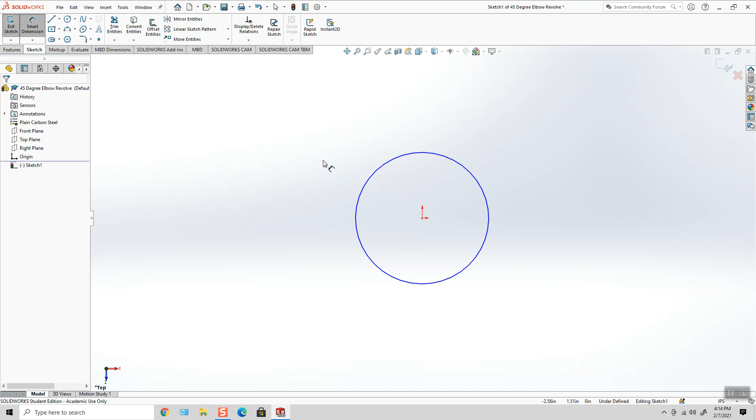This circle represents the outside diameter of the elbow, the main midsection of this part. So to get that, it's going to be the through hole, which is 1.62, plus 0.375, plus 0.375, 3/8 per wall of this circular tube. When you add all that up, it comes out to 2.37, but these numbers are all fractional, so it's safe to assume that the outside diameter would be 2 3/8.

And I can round that up to 2.375, and then SolidWorks will round down for me. So it's very minor. If there's a fraction on a blueprint, this is my approach.

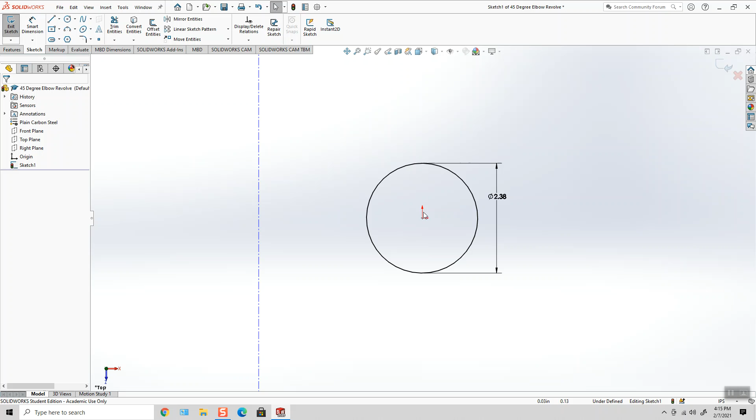Now, because I'm using the Revolve command, I need to sketch a center line which represents my axis of revolution. I have an infinite length center line at some distance to the left of my origin, but if I think of this as my center line, it's also going to be the radius that you see on the blueprint in the front view. So the 4.88 radius

is the key. So now if I put my isometric view on, all I have is a circle that's attached to my origin and a center line, an infinite length center line that's 4.88 inches away.

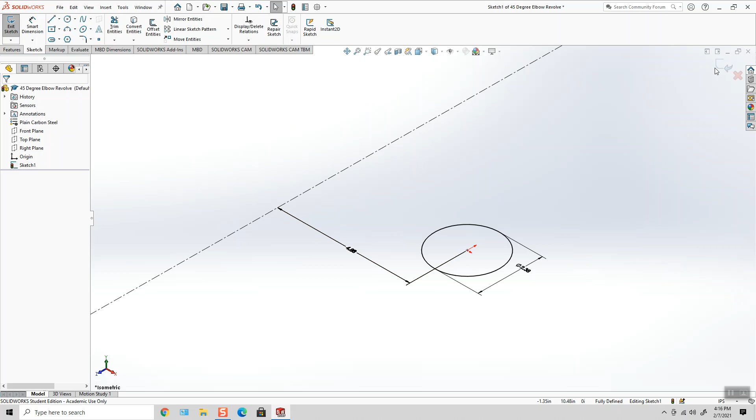Now if I select Revolve, SolidWorks wants to take this circle and revolve it 360 degrees around the axis of revolution, but that's not what we want. So we don't want 360, I'll switch that to 45.

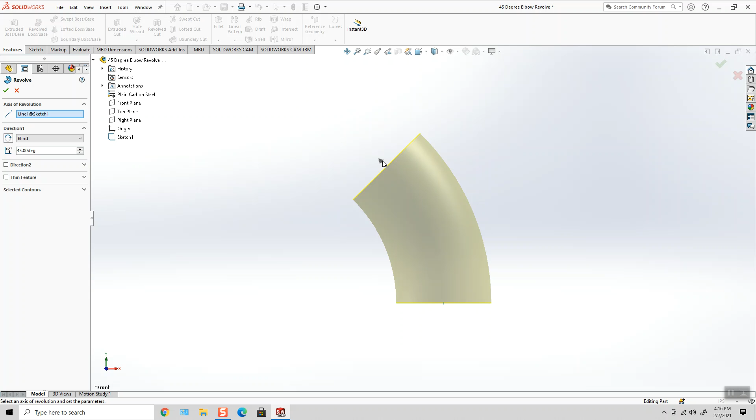So now looking at it from the front view, we have drawn that circle on the top plane, and now that circle travels up here to 45 degrees. We know our center axis is correct because it's part of our sketch, so that in fact is our radius.

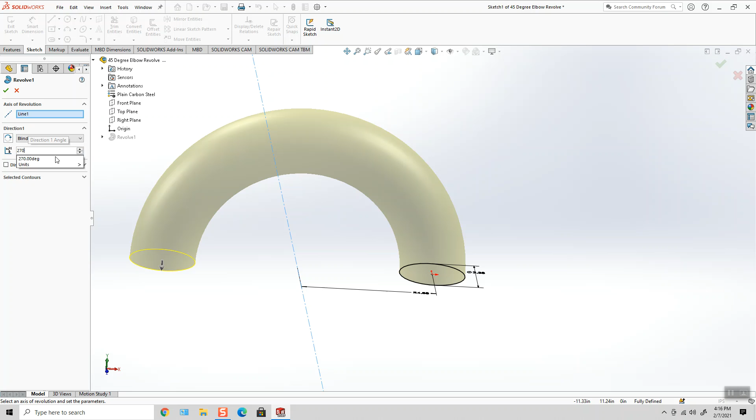The nice thing about this is now I can edit this feature, change it to 90 degrees, change it to 180, 270. I don't think it would go to 360, but you can see we have a lot of functionality where if I had a flange here, this would be my driving feature and would move that flange to those locations.

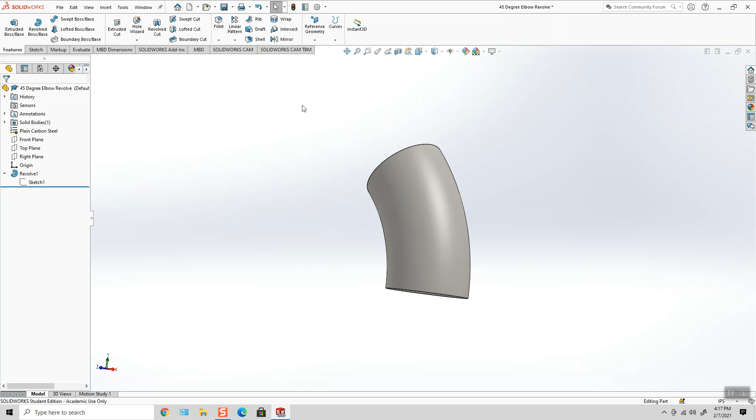So I'm going to set this back to 45. Put my isometric view on because I know it works. I know it doesn't fail. I can manipulate it, so that's good. My sketch is pretty concrete because all it contains is a circle and a line, a center line, so it's pretty simple. And we've got a ton of functionality with this feature now.

So perfect time to click File, Save, because I don't want to have to do any of that again.

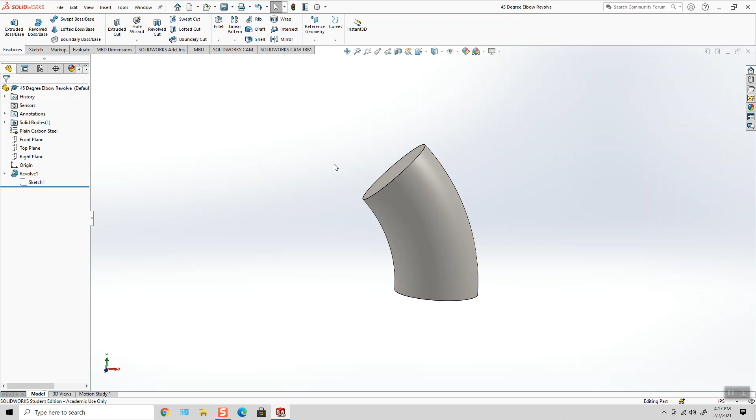Now I can choose to model the base or the top flange. So I'm going to start with the base. I'm going to sketch on the bottom surface of the part. Or I could sketch on the top plane, either or. And I guess I'm going to sketch on the top plane.

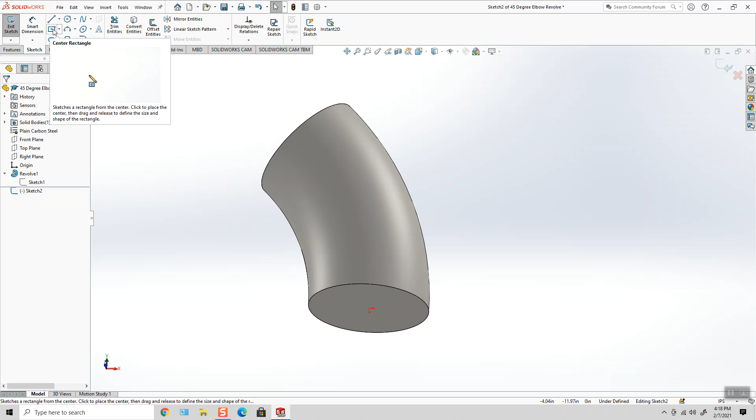It's a little bit more robust. So sketching on the top plane, which is also on the bottom of the part, I'm going to create a center point rectangle. I'm going to set the left or the right and top as equal because I want a 3.75 square. So from here to here is 3.75. And if you want to be fancy, before you exit the sketch, on the left-hand side, you can just hit this little square symbol, and now it tells the machinist that this is a 3.75 square.

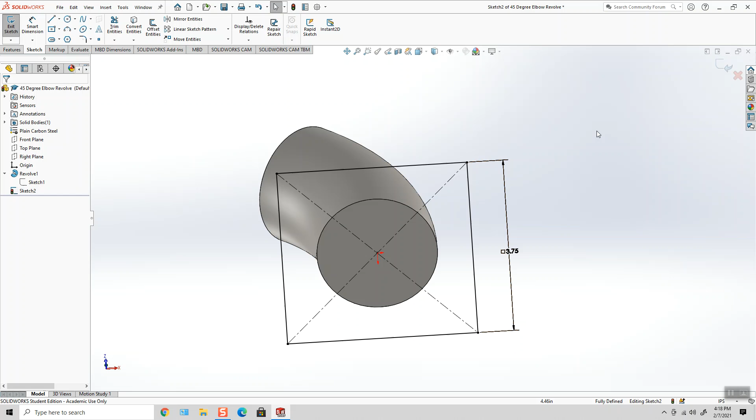I'm not going to add the fillets or the drilled holes at this time because I just prefer to make them as features. So now it's extruded, and I'm going to move on to the top flange next.

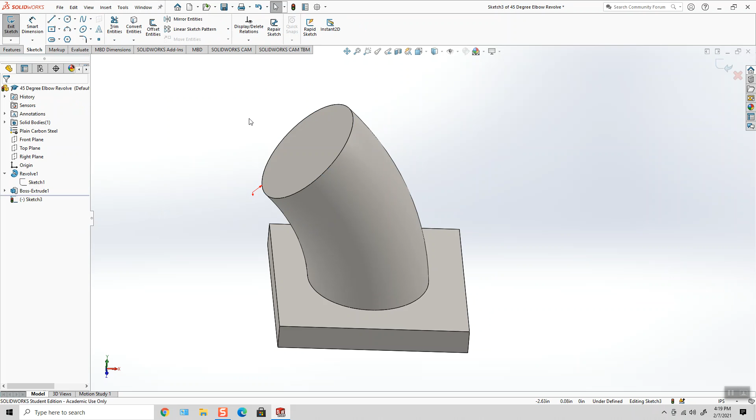Actually, I'll do a quick file save. And now I'll sketch on the top surface. I'm going to draw a circle off to the side and dimension it to 3.88 per the blueprint.

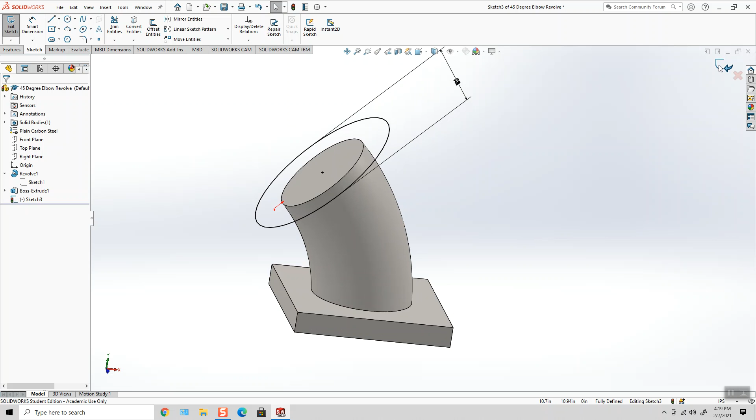And now I'm going to manually add a relation between this circle and this circle, forcing them to be concentric. I like to draw the circle off to the side and manually add the relation. I just think you get it right 100% of the time if you do it that way versus letting SolidWorks assume or guess.

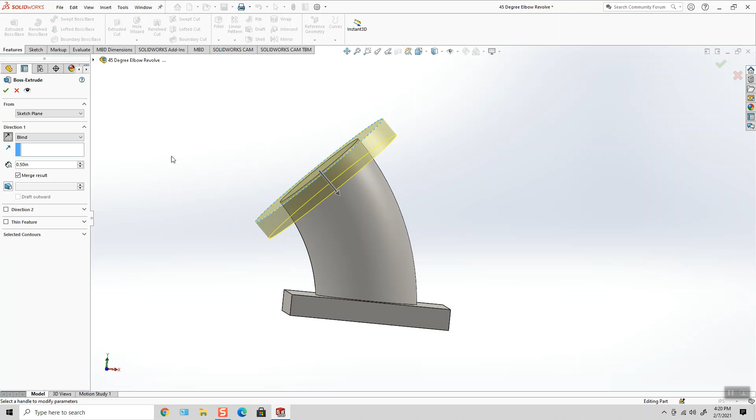So now I'm going to add an extrude in this direction, not that direction, because that would make the part too long. I think the angle would change. We want it here. The end of our angle stops at the end of this elbow, so I don't want anything going past that. So you'd have to hit the reverse direction button in order for that to work.

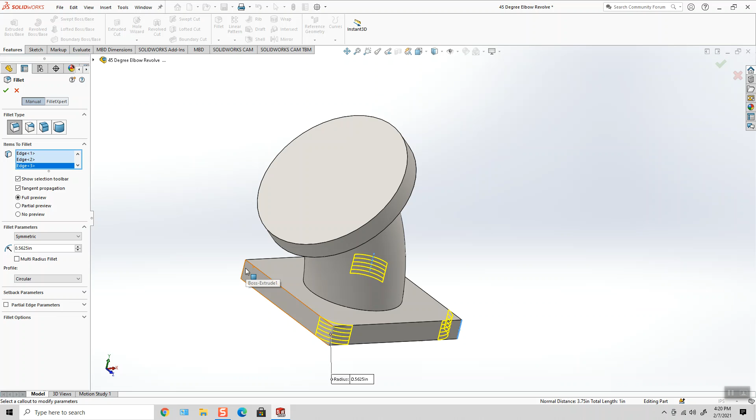Okay, and now I can go ahead and add the large 9/16 fillets at the bottom. I can do all four at the same time. And then I can go ahead and add the 1/8 fillets everywhere else, so here, here, here, and here.

I can now add the drilled holes at the bottom, and I'm going to use Hole Wizard. Pre-select the surface I want to put the hole on. And from Hole Wizard, I want a traditional hole, ANSI inch. I want fractional drill sizes. You want 3/8 as your size, and you're going to hit through all.

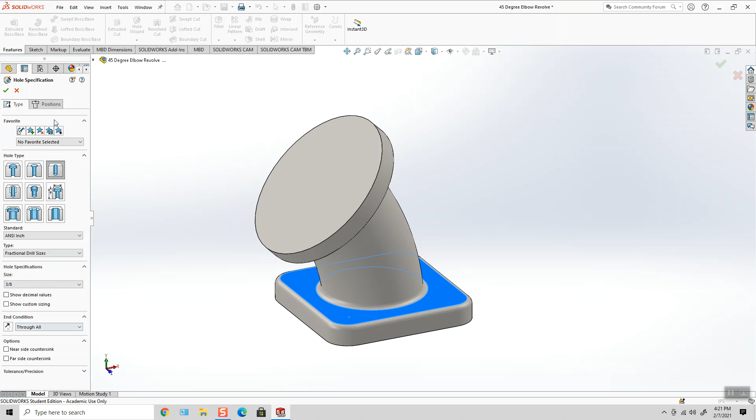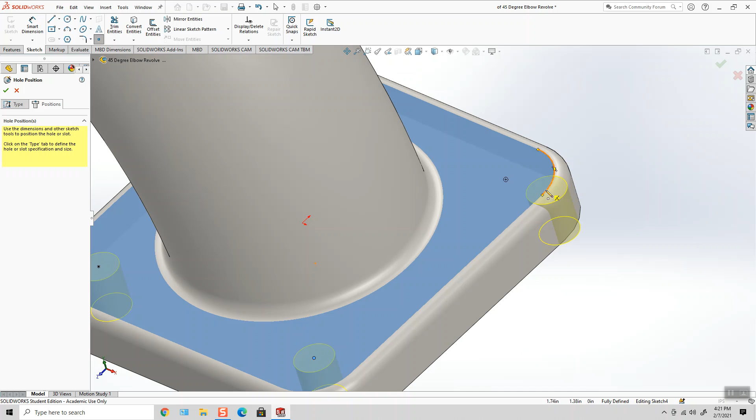Once you define the type of hole that you want, you're going to click Positions. And in this case, we don't need any dimensions or relations, right? All I have to do now is bring my cursor over to this silhouette edge, and you'll notice the center appears. So I can just kind of drop the point right on top of that center, and I can do that for all four of these 3/8 holes.

And then when I'm done, I can exit out of the point command, and you don't want to see any blue geometry, you don't want to see any blue points. If you see a blue point, it means you missed your relation, and you'll have to add it manually. So I'll put my isometric view on.

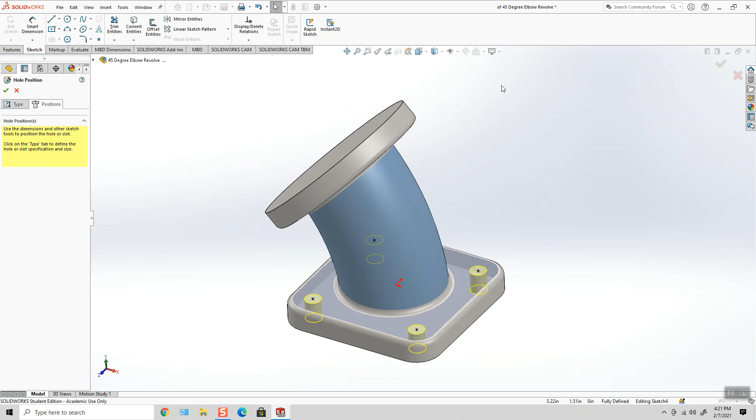I'll hit the green check mark and exit out of Hole Wizard. And before I do anything else, I'm going to make sure I have no negative signs to the left or underneath Hole Wizard. So I'm good, I have no negative signs. I'm going to hit File, Save.

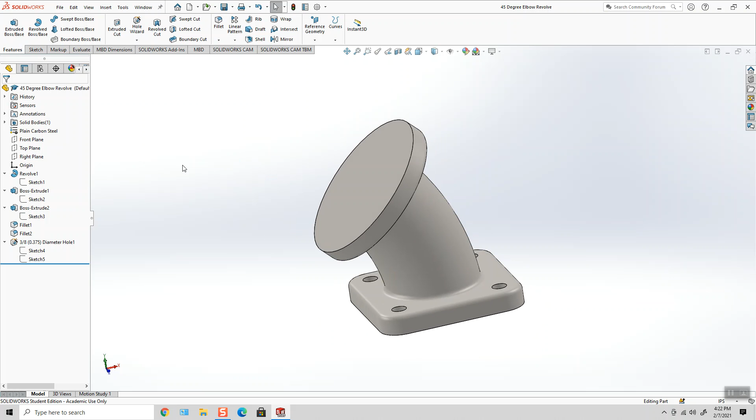And now I'm going to focus on the center, the 1.62 center cut hole. So I'm going to cheat. I'm going to go over here to Sketch 1, and I'm going to show that sketch.